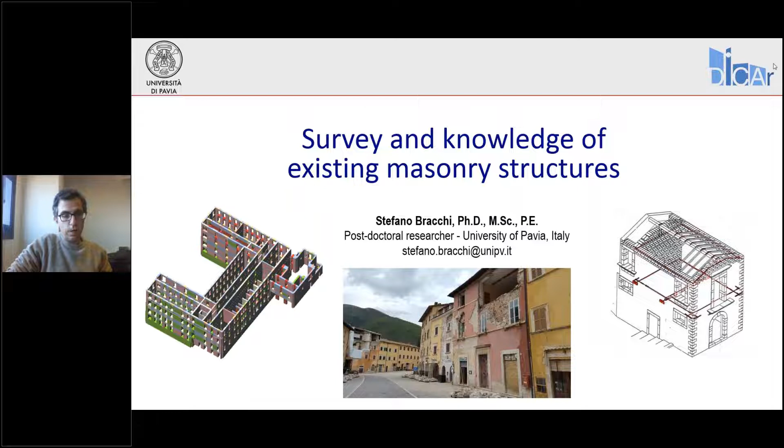So in the first webinar, last time you've seen this slide, which is representing how Eurocode 8 Part 3 is approaching the problem of the assessment of existing masonry buildings. Now, the first stage consists in getting the knowledge of the building's current state.

In the second step, you have to perform an analysis of the building. It can be a local analysis and/or a global analysis. As a last step, you can perform the design of the retrofit interventions.

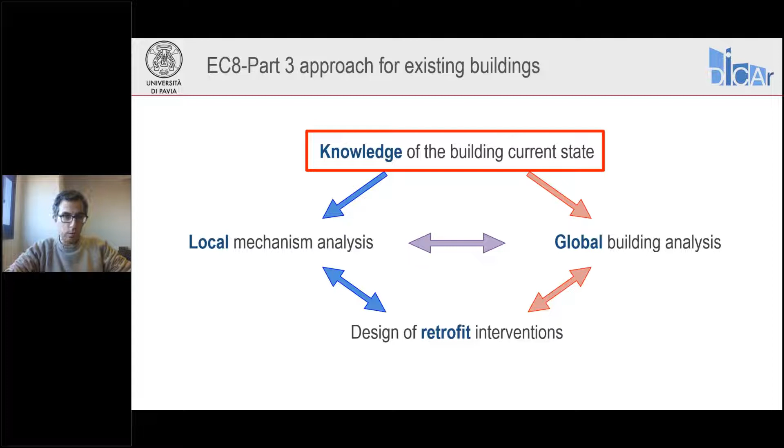So before looking at what Eurocode 8 is saying, I just want to point out why it is important to get knowledge of masonry buildings, and so why it is important to have a proper survey of the building. It is important because, differently from other building typologies, the seismic behavior of masonry buildings is influenced by a really large amount of quantities and factors.

For example, it is influenced by the pattern, quality, and strength of masonry. In particular, it is influenced by materials and by the interlocking between the materials and among the leaves, in case of masonry made by more than one leaf.

It is influenced also by the load transfer to foundations, which is a function of the geometry, of the plan or elevation irregularity, the distribution of the vertical loads, and also it is a function of the thrust of horizontal elements like roofs, arches, or vaults.

The behavior is also influenced by the efficiency of connection among the elements, such as the interlocking among walls or the wall-to-diaphragm connections. And it is influenced also by the effect of strengthening elements, such as tie rods or ring beams, that can be present. Finally, it is influenced also by the interaction with adjacent buildings.

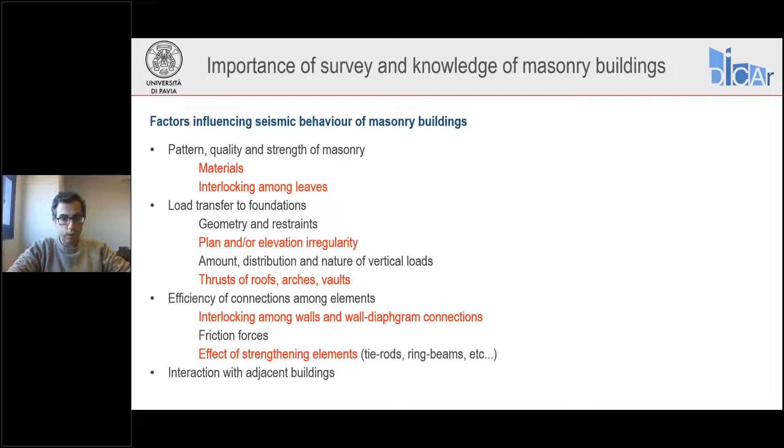Now here you can see some examples of damage during an earthquake due to these factors that I was mentioning. For example, on the left you can see some collapses due to disgregation of masonry, which is not made of good quality material.

On the right, you can see some collapses due to instability of walls, which are made of double leaves, having poor connection.

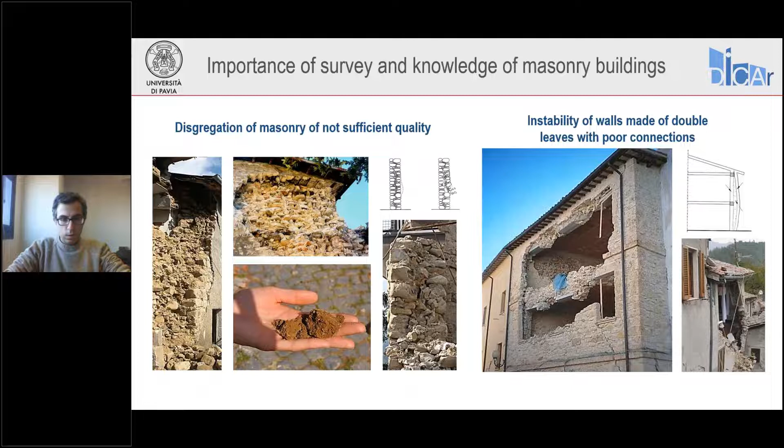Here you can see some effects, some failures due to problems of plan or elevation irregularity. For example, here you can see a collapse of the facade due to plan irregularity, because in this portion of the building there was a big room, so no transversal walls, which could potentially act as a restraint of this facade.

Here you can see some damages due to elevation irregularity.

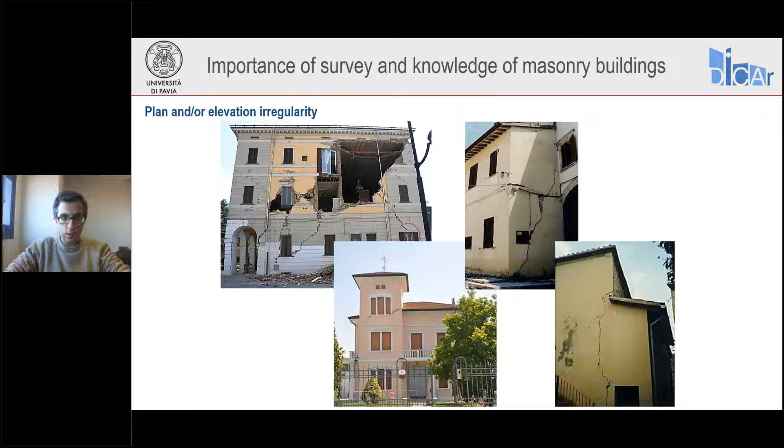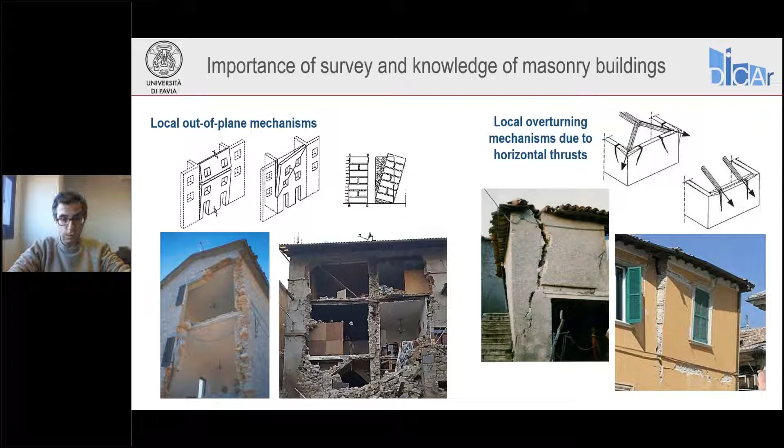Now, in these slides you can see some examples of local out-of-plane collapses, so collapses due to this kind of mechanism. Whereas on the right you can see the effect of possible horizontal thrusts. Here you can see some essentially collapse, because this is almost a collapse of a portion of masonry. Now, usually these are the mechanisms that are more commonly taking place in masonry buildings.

Here you can see some example of global response of a masonry building with only in-plane damage of piers and spandrels. Now this is the most favorable mechanism for a building that an engineer has to somehow seek.

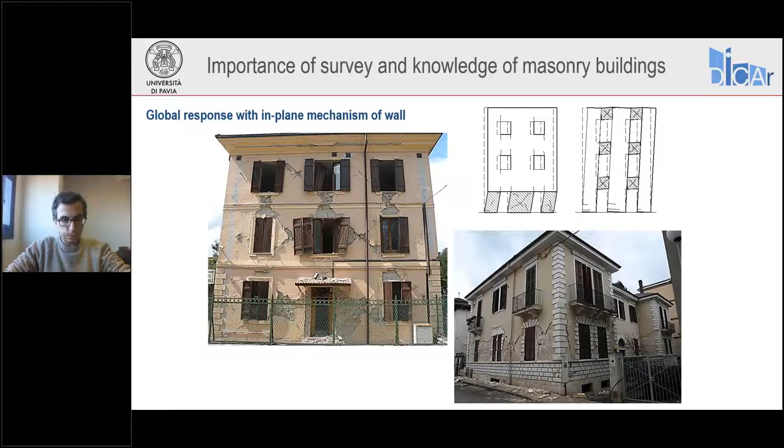Now how is the Eurocode 8 facing the problem of survey and knowledge? First of all, the Eurocode which is facing this problem is the Eurocode 8 Part 3, so which is the part of Eurocode devoted to assessment and retrofit of buildings.

Now the current version is the one of 2005, which consists of 90 pages, which can be a lot, but actually is not, because 90 pages are not only relative to masonry buildings, but are relative to all the structural typologies.

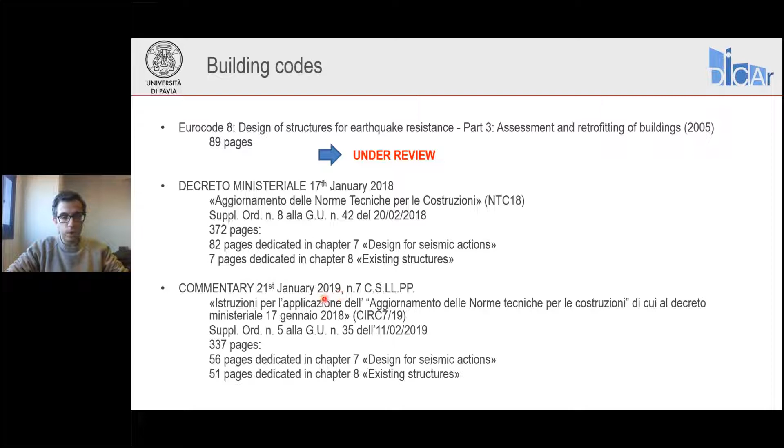Now this code is actually under review, and it is very, very likely that there will be, first of all, a larger amount of information. So probably the new Eurocode will not consist of only 90 pages, but more pages. And there will be aspects taken from other codes, such as the Italian code that has been already updated. The Italian code, which is the version of 2018, but also its commentary, which has been released in 2019.

So what Eurocode 8 part 3 in its current version says about this problem, the problem of knowledge and survey, is faced in chapter 3.

If you look at chapter 3, you can see different sections. The first regards general information and history. Eurocode 8 asks the engineer to collect information on several aspects, the most important being available documentation regarding that specific building, field investigation, and in situ and laboratory tests.

It also stresses the importance of cross-checks between the different sources of information, just to avoid discrepancies between the different sources.

There is also a section called required input data, in which Eurocode 8 sets a list of information to be collected. I want to stress that this section is relative to all structural typologies, not specific only to masonry. Here, Eurocode 8 asks you to find information regarding the structural system, the dimensions of the building, and of the structural elements resisting the loads.

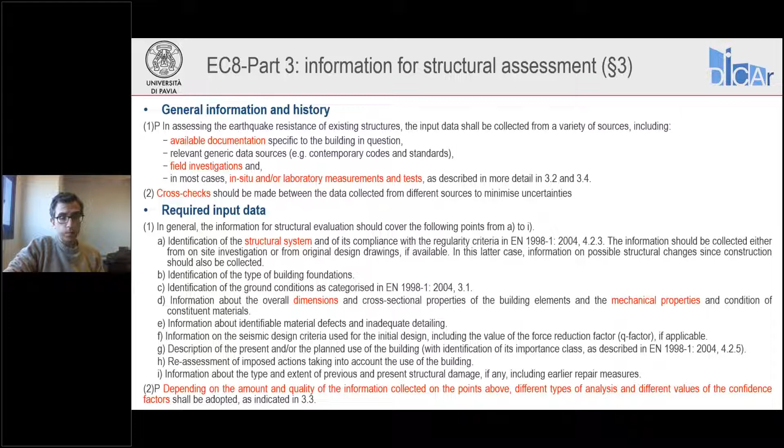Now the most important sentence of this part is the last one, which says: depending on the amount and quality of information collected, different types of analysis and different values of the confidence factor have to be adopted.

Eurocode 8 then introduces the concept of knowledge level. Knowledge level simply represents the amount of information, the amount of knowledge, the engineer is getting on the building to be assessed. There are three possible levels, ranging from 1 to 3: KL1 is limited knowledge, KL2 is normal knowledge, and KL3 is full knowledge. So increasing the number means increasing the knowledge on the building.

The factors influencing the different knowledge levels are essentially three: geometry, details, and materials. All this information is summarized in table 3.1, which I'm going to comment on here and in the next slides.

Regarding geometry, it is represented by the geometrical properties of the structural system. Details can include, for masonry buildings especially, connections between floors and diaphragms, connections between walls and diaphragms, and properties of joints. For other structural typologies such as RC buildings, details also include information regarding the reinforcement. Materials are represented by the mechanical properties of the building's material.

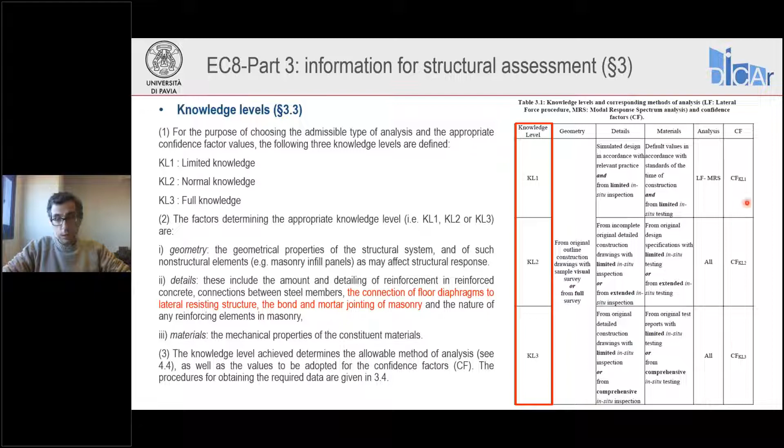Now, what is the meaning of knowledge level? It is this: if you move from KL1 to KL3, you increase the extent of investigation, and so also the cost of investigation, but you reduce the uncertainties.

So moving from KL1 to KL3, in theory, you go to a less conservative assessment. This doesn't mean that moving from KL1 to KL3 necessarily increases the cost, because potentially if you move to KL3, the amount of retrofit you need can be less. So these are the costs of investigation, not the total cost of the interventions.

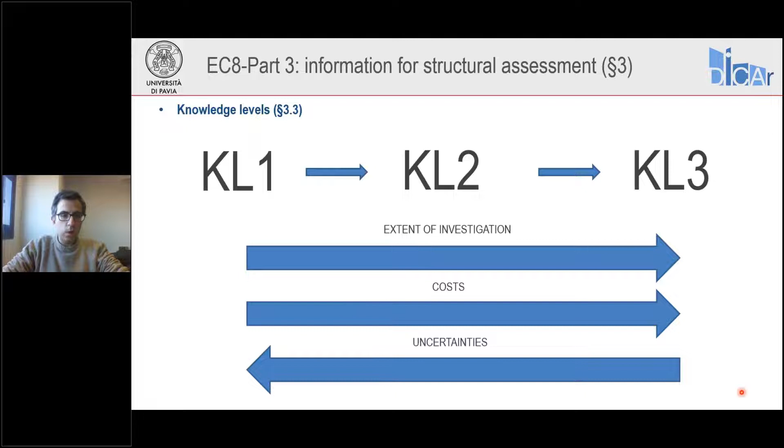Now it is the engineer who has to find a balance among all these aspects and select the proper knowledge level.

Now let's comment on table 3.1, looking at the different columns. Regarding the geometric survey, Eurocode 8 introduces 4 definitions.

Outline construction drawings: these are documents that describe the geometry of the structure, allowing for the identification of the structural system, essentially, and the dimensions of the different elements.

Then it introduces detailed construction drawings. These are essentially the same as the outline construction drawings, but in addition they include information regarding details.

Then Eurocode 8 introduces the concept of visual survey. A visual survey is a procedure where the engineer checks the correspondence between the outline construction drawings and reality. It's not checking all the elements, but probably, for example, the dimensions of the most important elements.

Finally, there is the concept of full survey. Full survey is like the visual survey, but extended to the whole building. The aim of this survey is to produce structural drawings. So it is used when these kind of drawings are not available, or when you want to reach the full knowledge of the building.

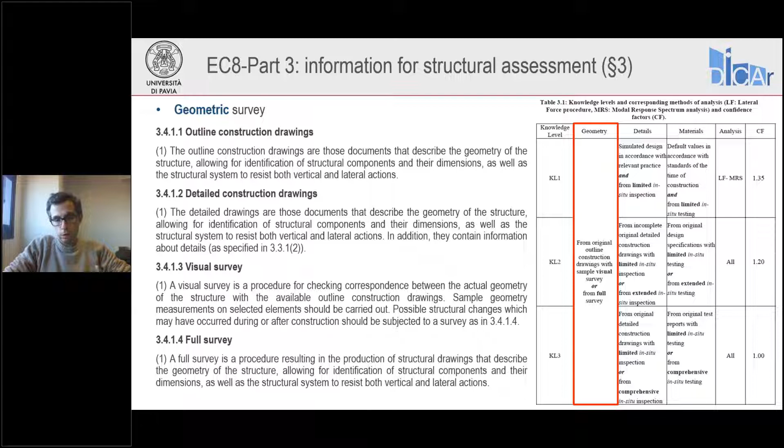Now, regarding the detailed investigation, Eurocode 8 is introducing the concept of simulated design, which consists in considering the code which was in force at the time the building was constructed, and reperforming the design according to this code. This is particularly useful for reinforced concrete structures, because in this way you can have an estimate of the amount of reinforcement in case you don't have this kind of information.

Then there is the concept of limited in situ inspection. A limited in situ inspection is a procedure for checking the correspondence between the information on the details which are in the documents available and the reality.

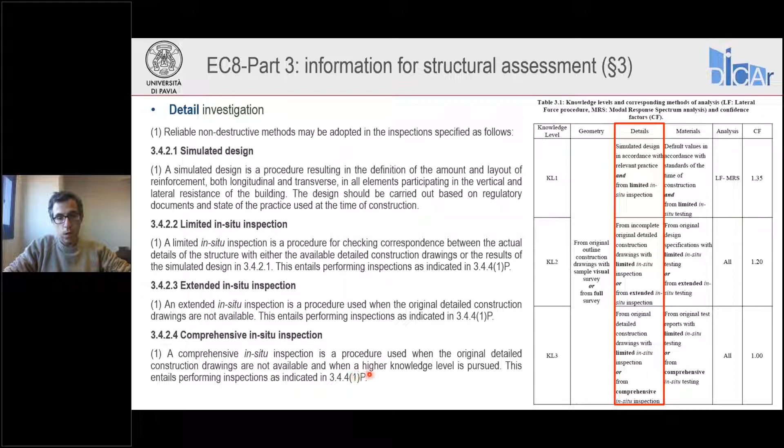The extended in situ inspection is essentially like the limited in situ inspection, but it is more extended, and is used when you don't have information on the details coming from original documents. Finally, Eurocode is introducing the concept of comprehensive in situ inspection, which is like extended in situ inspection, but more extended still. They are used when you want to reach the highest knowledge level.

Now, moving to material characterization, Eurocode 8 is introducing the concept of destructive and non-destructive tests. In particular, Eurocode says non-destructive tests have to be used, but also in addition to destructive tests, possibly.

There is then the concept of limited in situ testing. This is a procedure to be used when you have information on the material properties coming from standards at the time of construction or from original documents.

Extended in situ tests are tests you have to perform when original design specifications regarding the materials are not available. Comprehensive in situ testing is essentially an experimental campaign like the extended in situ testing, but again, more extended.

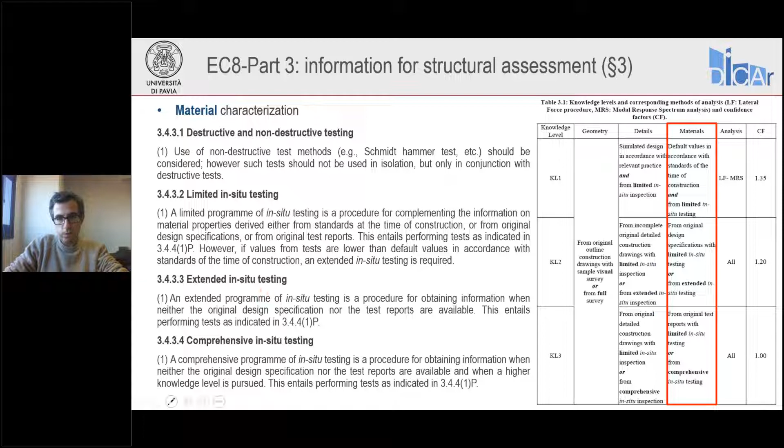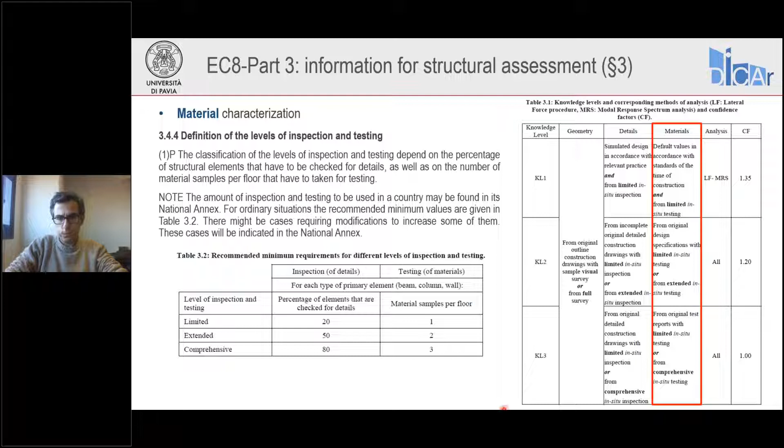Eurocode 8 is then introducing the global analysis method to be used in the assessment. It is mentioning linear elastic methods like equivalent lateral forces and modal superposition methods, and also nonlinear methods.

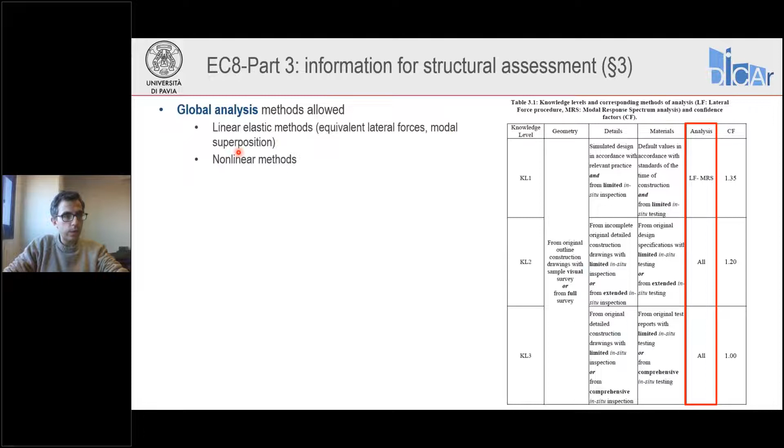Finally, it is introducing the concept of confidence factor. Now, confidence factor is a factor that has to be applied to material strength. This factor is reducing when you increase the knowledge.

It is used in two ways. It can be used to reduce the mean strength, when these strengths are used to calculate the capacities, which is almost the most common situation. But it can also be used to increase the mean strength in case of ductile elements, when these strengths are used to calculate the demand on brittle elements, and is typically used in a capacity design framework.

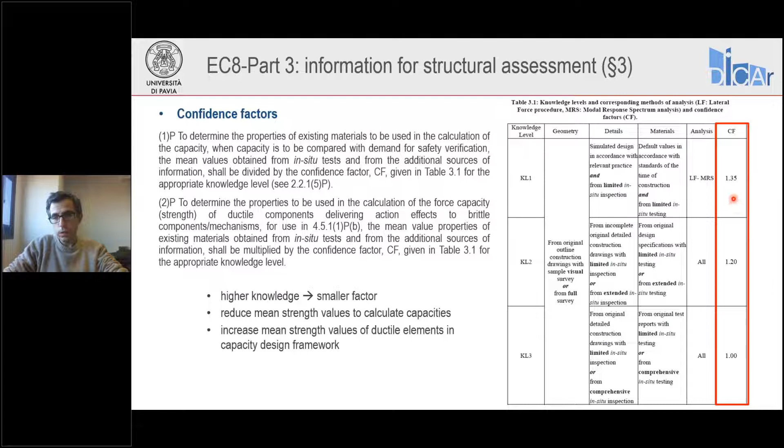The recommended values of these confidence factors are listed in this table, and are ranging from 1.35 to 1.

Now let's see what Eurocode 8 is requiring the engineer, depending on the knowledge level that the engineer is selecting. At knowledge level 1, Eurocode 8 is asking you to obtain information regarding the geometry from original outline construction drawings, with also some visual survey. If these original construction drawings are not available, you have to perform a full survey.

Now, this part regarding the geometry is essentially common to all three knowledge levels, so I'm not going to repeat it for KL2 and KL3. Regarding the inspection of the details, Eurocode 8 is asking you to perform a simulated design, and also to perform limited in situ inspections.

Regarding the materials, you have to use some default values in accordance with the standard of the time, even though no indications are given by Eurocode 8 on these default values. And you have to perform also some limited in situ testing. You have to use only linear methods and apply a confidence factor of 1.35.

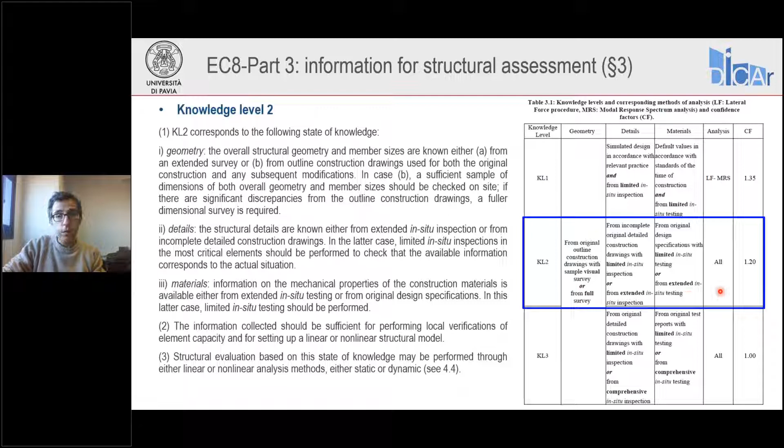Information on the mechanical properties of the materials has to be obtained from original design specifications with limited in situ testing, or from extended in situ tests. Differently from KL1, all methods of analysis, both linear and nonlinear, can be used.

And the confidence factor to be used is 1.2. Finally, at KL3, information on the details has to be obtained from original construction drawings with limited in situ inspection,

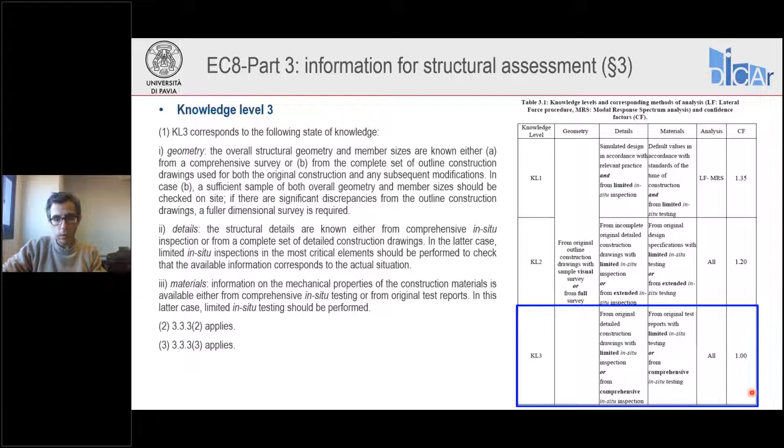or from comprehensive in situ inspections. Information on the mechanical properties of the materials has to be obtained from original test reports with limited in situ testing, or from a comprehensive in situ test campaign. Again, all the analysis methods can be used, and this time the confidence factor is 1.

The information that I was discussing before is somehow valid for all the structural typologies. So now the question is: is there specific information regarding masonry buildings?

Yes, and we have to look at Annex C of Eurocode 8 Part 3. Here there's a first section regarding general aspects, where the code asks the engineer to look for information regarding the type of masonry units, the connection between the elements, and of course the properties of materials.

Regarding the geometric survey, the code is asking the engineer to look for information regarding the size and location of the shear walls that resist the seismic load, the dimension of the units, and the location and dimension of the openings. These are quite straightforward pieces of information.

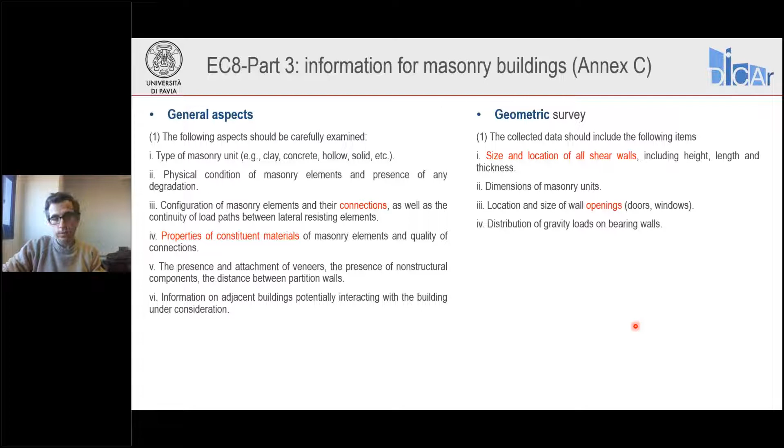Regarding the investigation of details, the code suggests checking a list of different aspects. The most important are the quality of the mortar, the identification of the number of leaves in case the masonry wall is made of more than one leaf, the connection between orthogonal walls, and the connection between the vertical walls and horizontal elements such as floors or roofs.

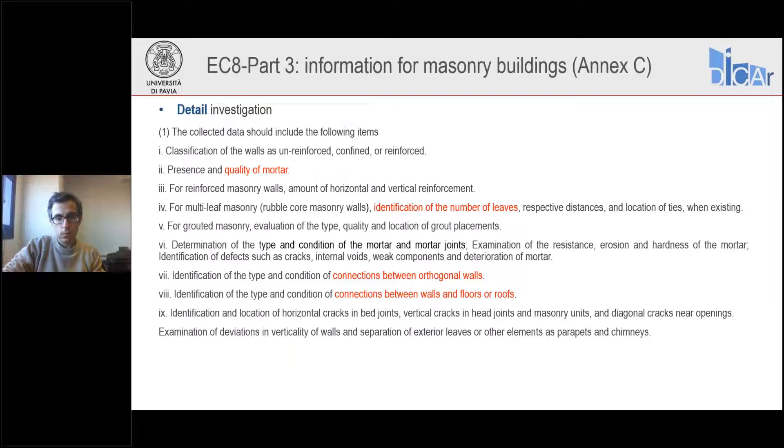Finally, regarding material characterization, the Eurocode stresses the importance of non-destructive testing. There is also a list of possible non-destructive tests to be performed, which are ultrasonic tests, impact tests, and radiography.

It also stresses the importance of destructive tests, or moderately destructive tests, which should be used in addition to the non-destructive tests. Possible moderately destructive tests are flat jack tests, which can be used to measure compressive strength or shear strength, diagonal compression tests, or large-scale tests.

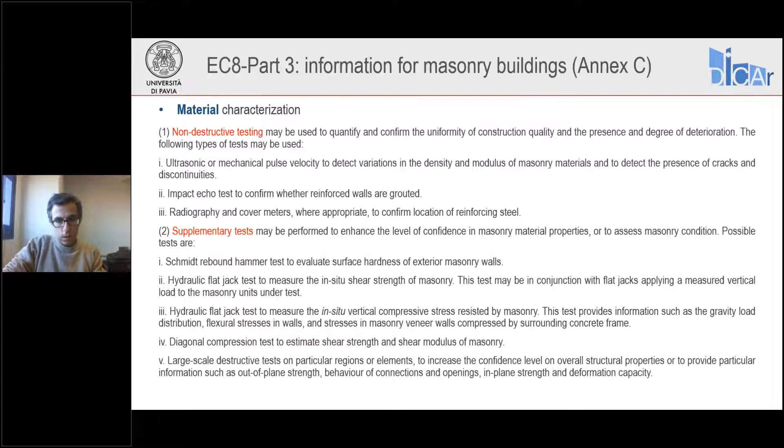Now we'll try to describe some tests or procedures to get information on different aspects. First of all, to get information on the geometry and details, you can use non-destructive procedures such as thermography and endoscopy. Thermography consists of using

thermal cameras, which are able to find discontinuities in a building. This is used to see, for example, if there are different masonry typologies in the building, if there is degradation of materials, or if voids are present.

Endoscopy consists of creating a very small hole and putting a camera inside so that you can see portions of the building which are hidden, which are not visible. So you can check voids, look at the wall section or floor section, and get information on both geometry and details.

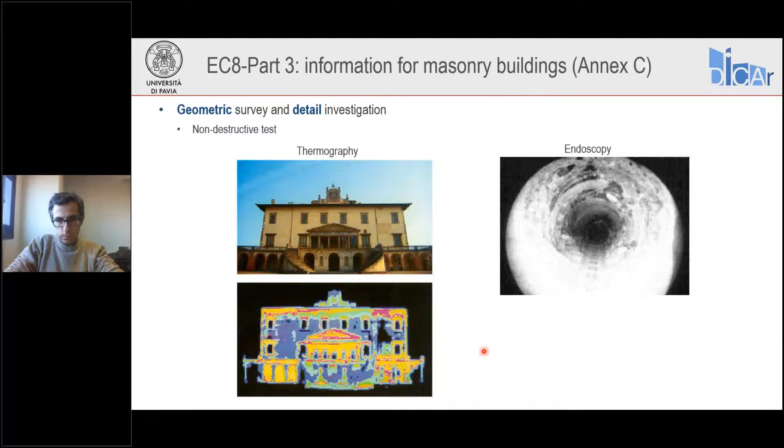Regarding material characterization, I've mentioned there are some non-destructive tests which I'm not covering here, and there are moderately destructive tests. One of the most common moderately destructive tests is the flat jack test, an in situ flat jack test.

It can be performed with a single jack, in which case you are able to measure only the compressive stress acting on the pier, or it can be performed with two jacks, in which case you are able to measure the elastic modulus and possibly also the compressive strength. How does it work? You are required to perform a horizontal cut in the masonry.

If you have a regular masonry, such as this one, you do the cut inside the joints. You put a jack inside, and if you have a single jack, you can measure the axial load acting, which is the stress acting on the pier.

If you do another cut and put inside another flat jack, you can somehow control the state of this portion of masonry. You can increase the axial load acting on this portion, and draw this stress deformation curve.

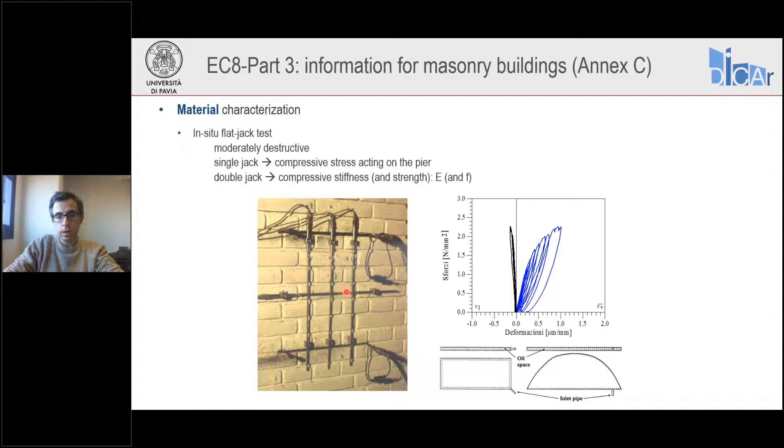The second test is the in situ shear test. It is similar to the flat jack test, so it's moderately destructive. It is used for regular masonry made of bricks or blocks having weak joints, because the goal of this test is to measure the strength parameters of the joints, the initial shear strength and the friction coefficient.

So in this way, if you move to a plane of shear stress versus axial stress, you can get a point. Varying the axial load and repeating all the tests, you can get different points. At the end, interpolating the results, you can get information on the initial shear strength and on the friction coefficient.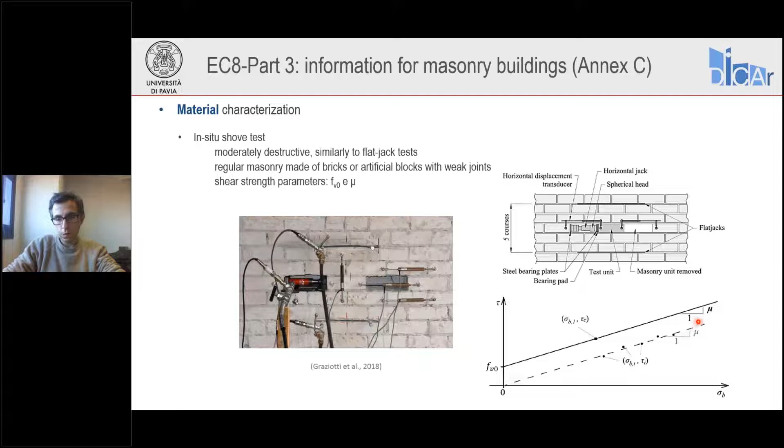It is used for regular masonry with strong joints, and is used to measure shear stiffness and strength parameters, so tau 0 and G.

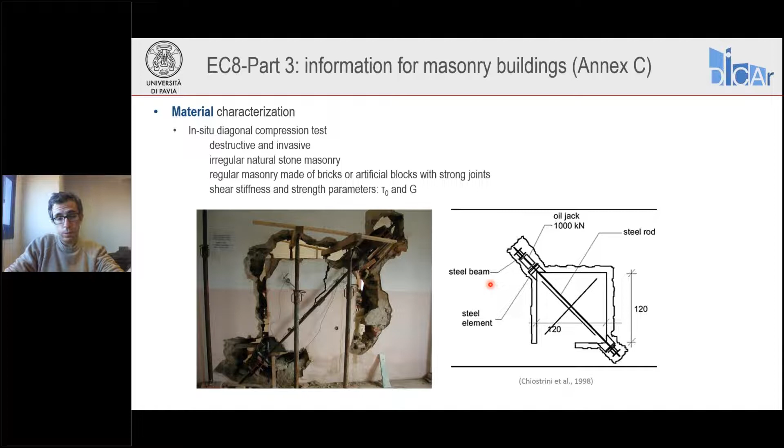As I was saying, you apply a diagonal load up to the failure of the panel. Once you know the load corresponding to failure, through simple expressions, you can get information on these parameters.

Another test, a highly destructive one, is the in situ shear compression test. This can be used for all types of masonry, and again, it can be used to obtain information regarding shear stiffness and strength parameters. How does it work?

You have to isolate a panel, apply a vertical load, and then a horizontal force up to the failure of the panel. Again, once you reach the failure, you can get information through simple expressions on the strength parameters, depending on the masonry typology and on the type of failure that you are attaining.

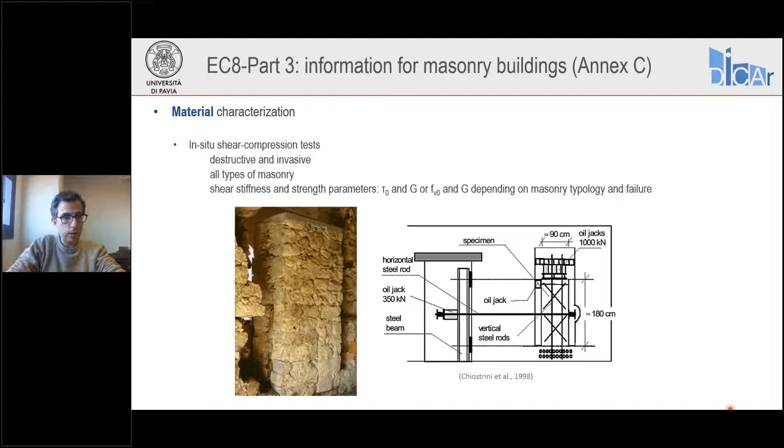The last test that can be used this time is not an in situ test, but a laboratory test, called the direct shear test. It is moderately destructive because you are required to extract from the building a sample made of 3 bricks and the joints in between.

So you extract this sample, bring it to the laboratory, and apply an axial force, which is orthogonal to the joints, plus a load which is parallel to the joints.

As for the shove test, you are able to obtain a point in the plane of horizontal stress versus vertical stress, and by varying the axial force, you can get different points. Again, by regression, you can obtain information on Fv0 and the friction coefficient.

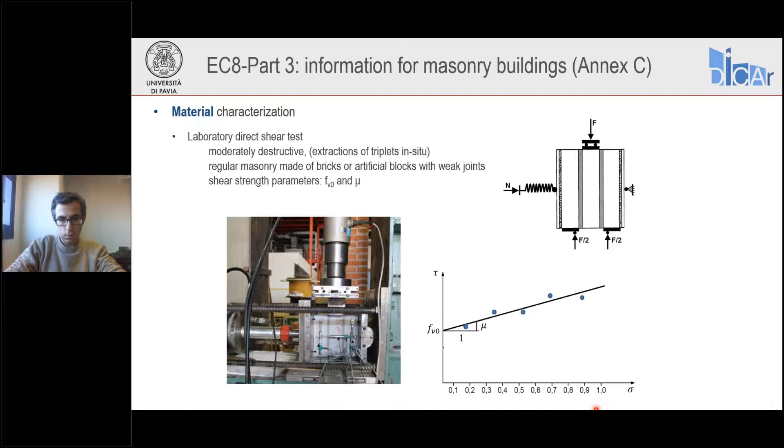Now, what I would like to stress here is that not in all cases are the parameters that you get from in situ or lab tests the parameters that you have to use in the structural analysis. For example, if we consider the initial shear strength Fv0, the test we were mentioning before allows you to obtain information on the strength of the joint.

If you are doing a structural analysis, for example using equivalent frame approaches such as Tremuri software, you are required to use strength criteria of the elements which depend on the shear strength of the panel. Now, these two parameters are not the same.

The difference between these two parameters is explained in the theory of Mann and Müller. Essentially, the relation between the strength parameters of the panel and the parameters of the joints are represented by these expressions. What I would like to stress is that this expression depends on the tangent of phi parameter, which is the inclination of the crack that can form in masonry.

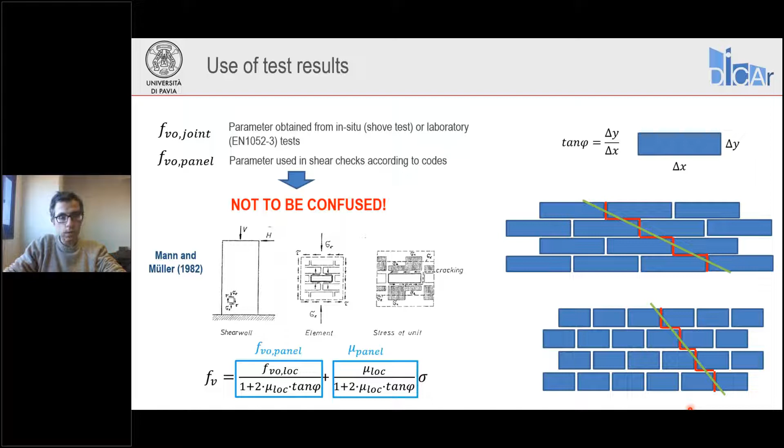This inclination can be different if the pattern is different. So at the end, you can have a situation where you have the same masonry with the same mechanical parameters, same dimension, same axial load, but the strength can be different depending on the pattern.

Now I would like to talk about some additional issues that are not currently in the current version of Eurocode 8, but will probably be introduced in a future review of the code. Essentially, these are taken from the Italian code, which has already been updated, as I was mentioning before.

Now, the first issue regards the reference values of mechanical parameters. If you remember, I was saying that Eurocode 8 asks you to use information from standards at the time of construction, but doesn't actually give information on these standards. The Italian code is doing what it's doing: it gives intervals of variation for mechanical properties for the different masonry typologies.

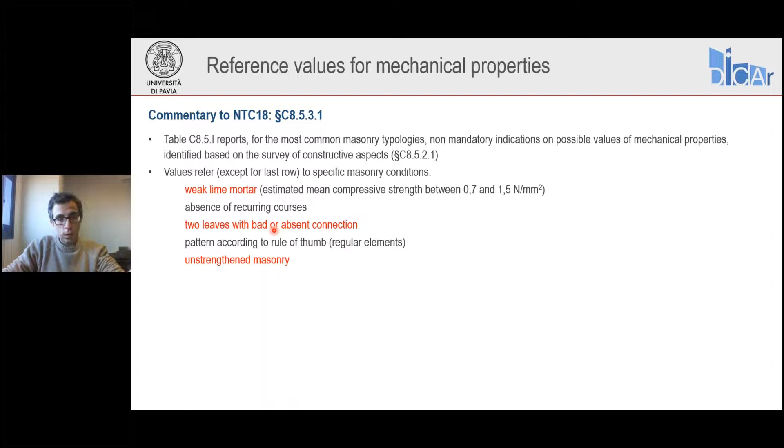These intervals of variation are valid in particular conditions, such as masonry with weak lime mortar, two leaves without a good connection, and unstrengthened masonry. So this is the table of the Italian code with the different masonry typologies and the intervals of variation.

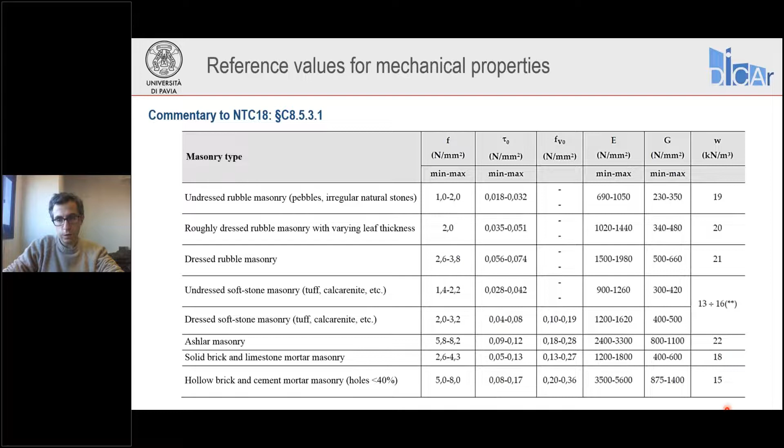The Italian code is also stressing the importance of some aspects. For example, if you have a double-leaf masonry, the Italian code is drawing attention to the fact that the outer leaf can be very vulnerable. So it's suggesting you reduce the strength and stiffness parameters of the outer leaf if it is not well connected to the inner leaf.

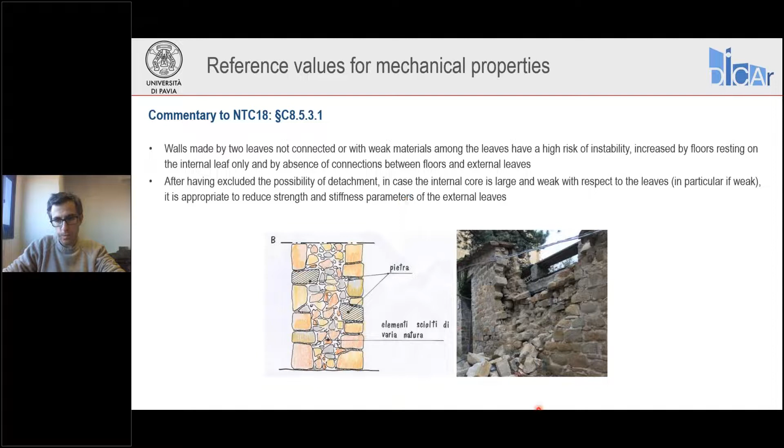Now, what do we have to do if the masonry actually has better conditions than the reference one? If masonry has better conditions, you can still apply the interval of variation from the table, but you are required to increase these values using some correction coefficients, which differ depending on, for example, whether the mortar has good quality, or there's the presence of recurring courses, or the presence of transversal connection elements.

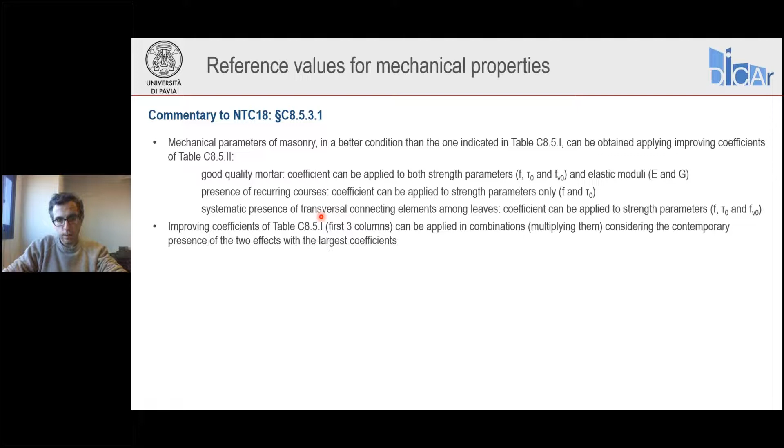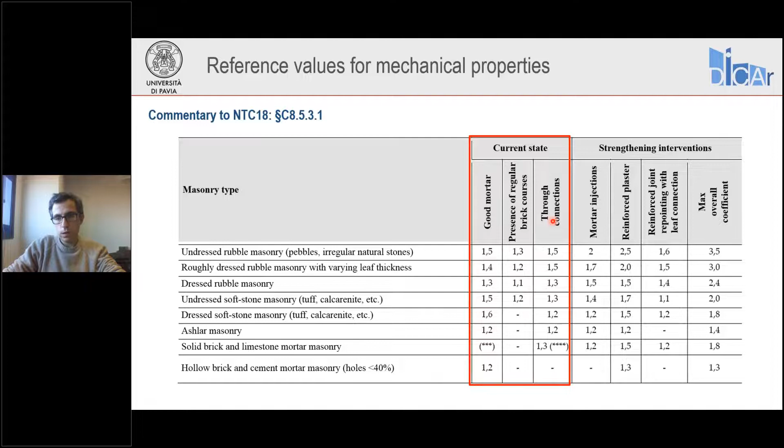Here you can see an example of this correction coefficient. You can see there are essentially three types of correction coefficients. You can apply a maximum of two of them, using the ones which give the largest effect.

If the masonry has some strengthening interventions, you can again use the same values from the table, but applying another set of correction coefficients.

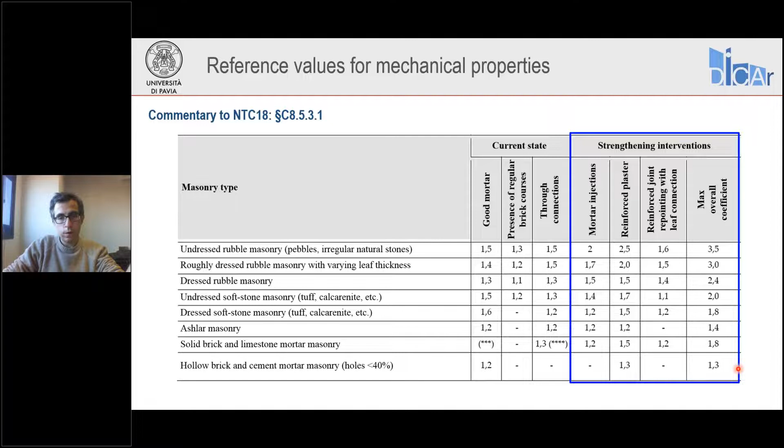The second issue regards the possibility of updating the knowledge of material properties based on experimental results. The fact is that at the highest knowledge level, knowledge level 3, you have information on mechanical properties coming from the table I was discussing before, or from code standards, and also information coming from tests, because you performed some experimental tests.

So the idea is to use both pieces of information, to combine them, and that can be done by a strategy called Bayesian updating. How do you perform this update?

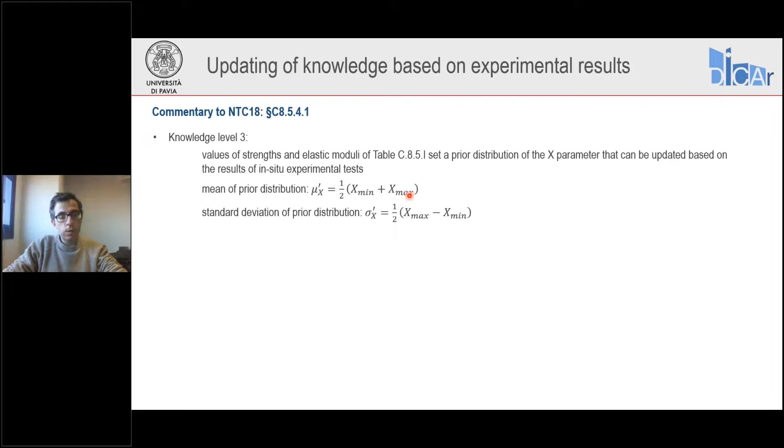First, you have to define a prior distribution, which is a probabilistic distribution defined by the mean and the standard deviation. Both these parameters are functions of x min and x max, which are the extreme values of the interval of variation from the table.

You are then required to apply these quite simple formulas to obtain the updated value of the mean. This formula is a function of the mean of the initial distribution, of the number n of tests that you performed, of the average value coming from the tests, and also of this k parameter, which represents the weight of the prior distribution - the information from the table - with respect to the experimental test.

This formula has to be applied to each mechanical property - of course, not to all of them, but to the mechanical properties on which you have experimental information.

The code also points out that if you have a large difference between this value and the one coming from the test, compared to the one coming from the prior distribution, you have to use this formula consciously. So you have to give a motivation for the use of this formula.

Now, with the increase of the number of tests, this final mechanical property tends to be nearer to the average of the experimental test, because the weight of the experimental tests tends to increase.

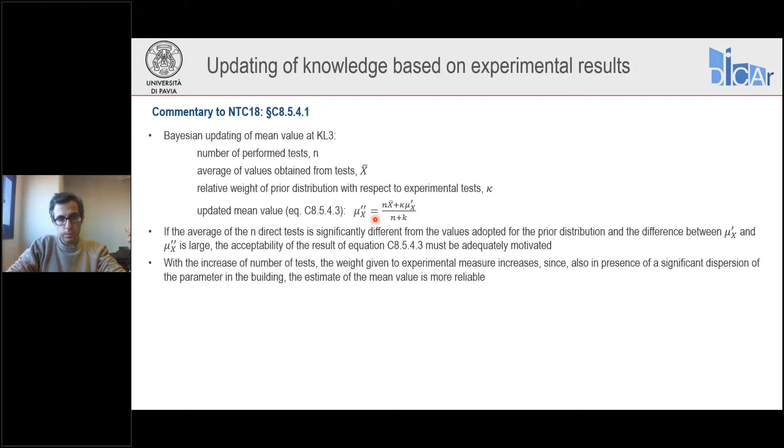In this table you can see the values of the k parameter depending on the typology of test that you are performing, and also depending on the parameter that you are measuring.

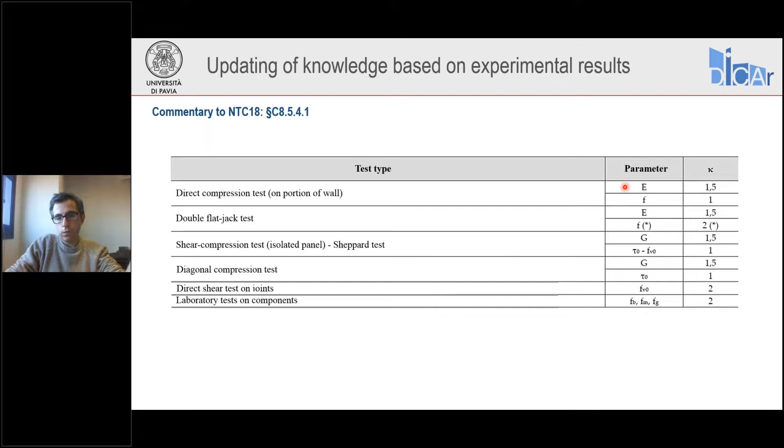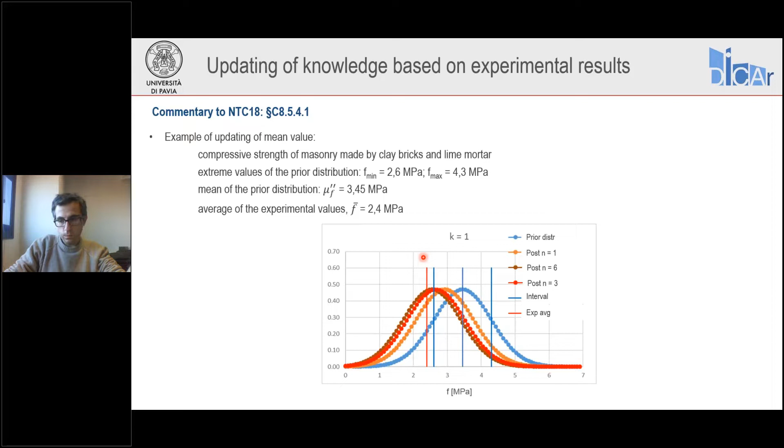To conclude this presentation, I would like to briefly mention an extended in situ test campaign in which we, as University of Pavia, were involved in recent years. The problem was the seismicity induced by gas extraction in the northern part of the Netherlands. I think there will be a webinar dedicated to this topic, but here I will briefly mention the problem.

What happened was that in this area of the Netherlands, the building stock was mainly made of unreinforced masonry buildings, which had not been designed to withstand earthquakes, because natural seismicity is not an issue in that area. But a series of earthquakes happened due to these gas extractions. Luckily the magnitude was quite reduced, but these buildings were somehow vulnerable to this seismicity.

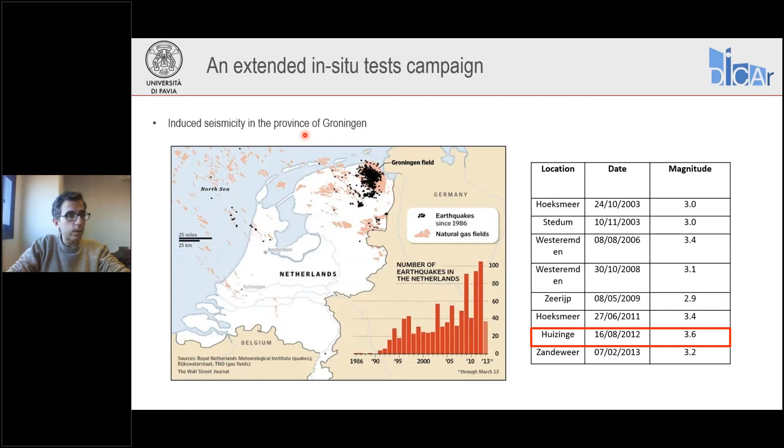So there has been a huge project dedicated to studying the vulnerability of these buildings. This project consisted also of a large experimental test campaign, including laboratory tests on components but also on entire buildings. It also included numerical simulation using, among other software, the software Tremuri, and a quite large in situ experimental test campaign.

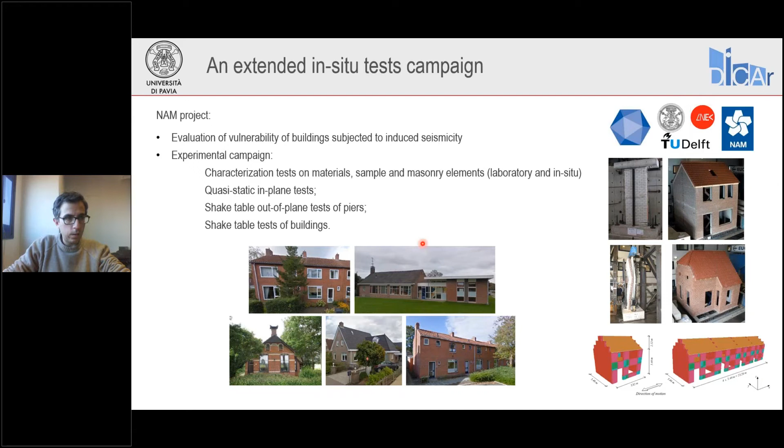Here you can see some of the buildings that were tested. The new aspect of this test campaign was that we were able to obtain a large number of results, because usually you don't perform a wide number of tests in an in-situ test campaign. This information also allows us to have information regarding the correlation among the mechanical parameters inside a building, and also with respect to the total buildings that were tested.

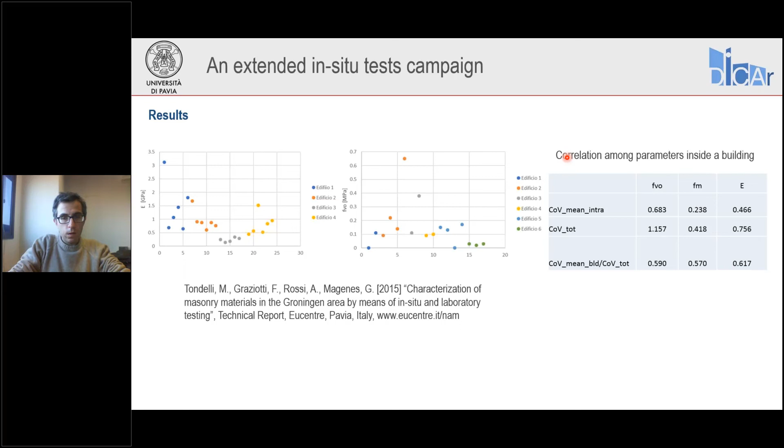So with this, I think I have concluded my presentation. I have said more or less everything that I wanted to say. I want to thank you for your attention.